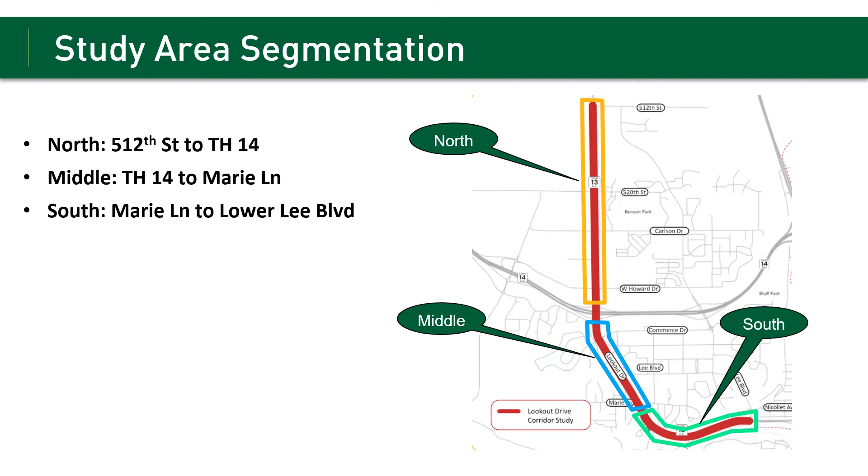Throughout the first engagement period in the fall of 2021, we heard the following general themes in the feedback provided. Lane configuration: the roadway may not be configured to make the best use of available space to meet the various needs of the corridor. Bike access: bicycles do not have dedicated and safe facilities to utilize along the entirety of Lookout Drive. Traffic speeds: posted speed limits are high in certain areas of the corridor, primarily in the middle segment, given the surrounding context. Roundabouts: related to speeds and lane configuration themes, consider implementing additional roundabouts along the corridor. Pedestrian safety: not all crossings are configured in a way that feels safe to cross Lookout Drive. Traffic noise: high speed and truck noise contribute to a higher than desired roadway noise.

We also asked users how satisfied they are with the corridor as built today, both north and south of Highway 14. North of Highway 14, almost 40% of users are somewhat dissatisfied with the corridor, and another 50% are somewhat satisfied. Common themes based on desiring better walking and biking infrastructure to allow children to get to school safely.

South of Highway 14, almost 60% of users are dissatisfied with the corridor, 10% are somewhat dissatisfied, and 20% are somewhat satisfied. Common themes revolved around speeding, noise, and walking/biking safety.

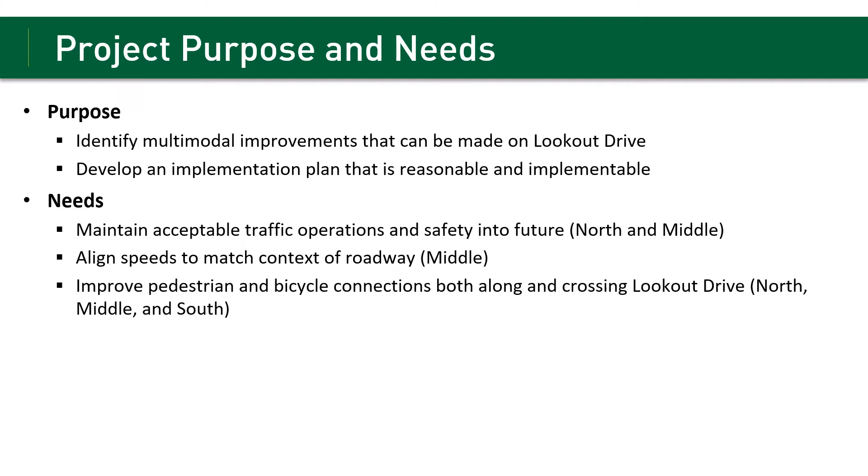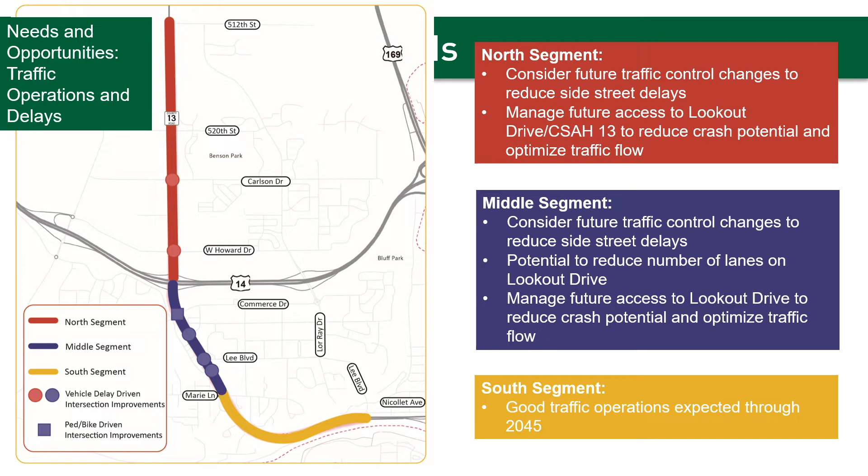Related to pedestrian and bicycle connectivity, each segment has a variety of needs and opportunities. North segment: no sidewalks or trails are north of Carlson Drive, there are no marked pedestrian crossings north of Highway 14, and there is a 45 to 55 mile per hour speed limit, which makes it difficult to cross on foot during high traffic time periods. Middle segment: traffic speeds over 50 miles per hour are common, there is a 5+ lane roadway width, and it is challenging for pedestrians to cross in this environment.

South segment: there are no sidewalks or trails. Pedestrians and bikes frequently use the shoulder. Reconsider need for truck climbing lane.

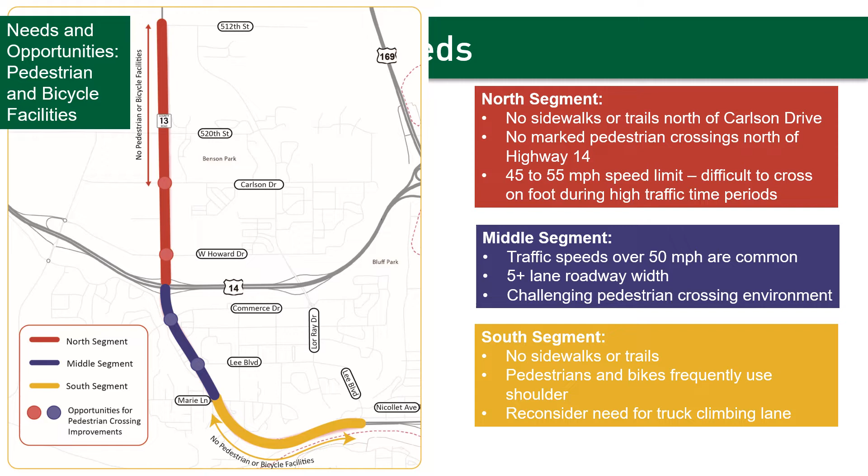As development continues to occur, added traffic will continue to increase pressure at intersections along the northern portion of the corridor. North segment alternatives include intersection modifications at Tim Road, Carlson Drive, and Howard Drive, as well as potential changes to the roadway itself north of Carlson Drive. Roadway changes would include ensuring proper pedestrian and bicycle infrastructure is incorporated.

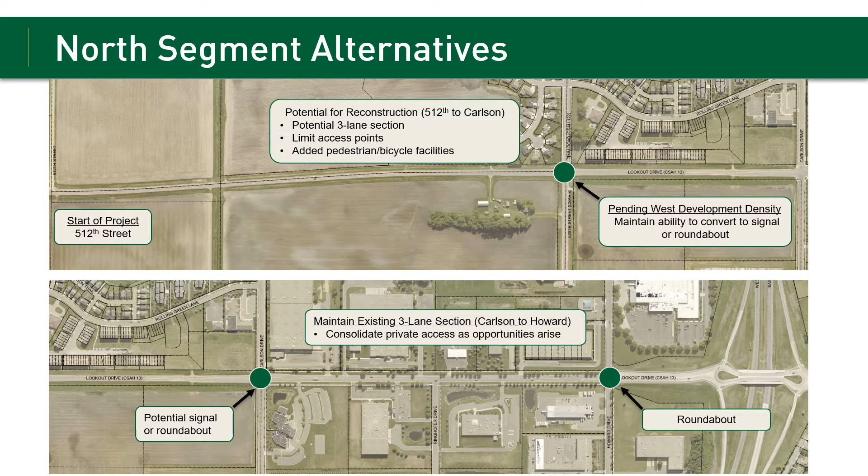The portion of roadway north of Carlson Drive currently is a 2-lane roadway. As development occurs, continuing the three-lane design from the south into this area will help manage conflicts, provide necessary turn lanes at key intersections, and allow for pedestrian and bicycle infrastructure to be installed.

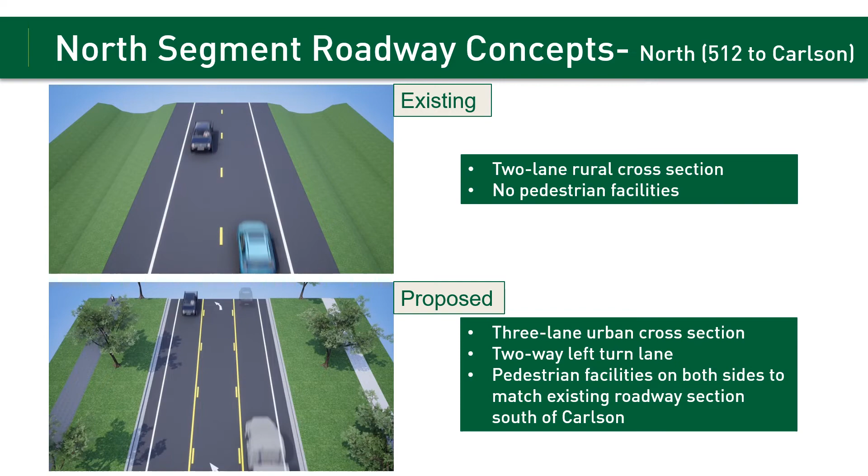Middle segment alternatives include intersection modifications at Commerce Drive, Upper Lee Boulevard, and Marie Lane, as well as potential changes to the roadway design itself, as described in the following slides.

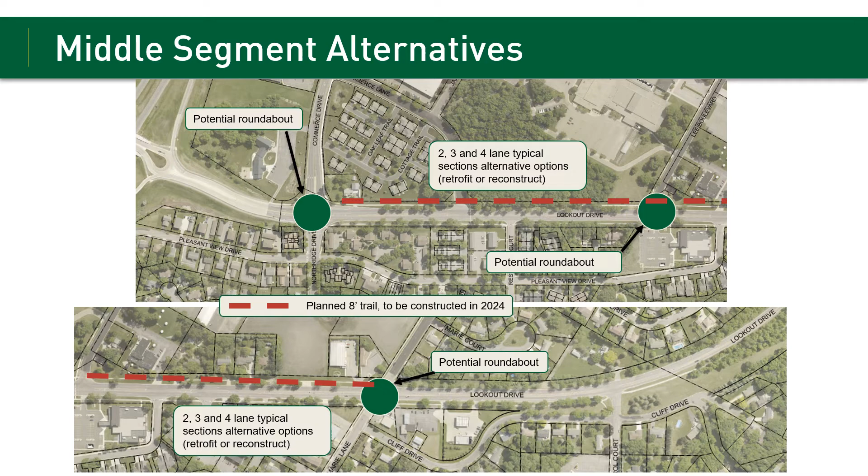The existing roadway section is 5 lanes wide, with 2 lanes in each direction and a center turn lane.

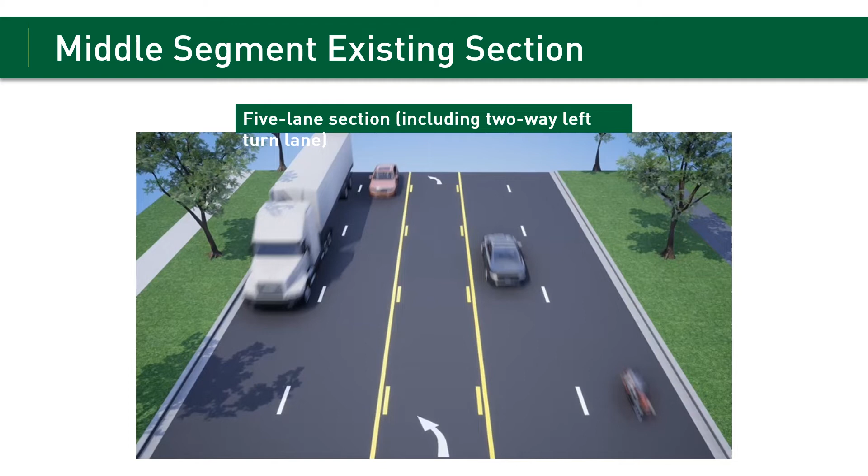The existing roadway section has a capacity of approximately 25,000 vehicles per day, which is about 2 times higher than the existing traffic volumes. Future traffic volumes are projected to be less than 15,000 vehicles per day in 2045. The 5-lane roadway design is not necessary to manage the levels of traffic forecasted for this corridor. Therefore, reduced footprint scenarios were considered as shown on the following slides.

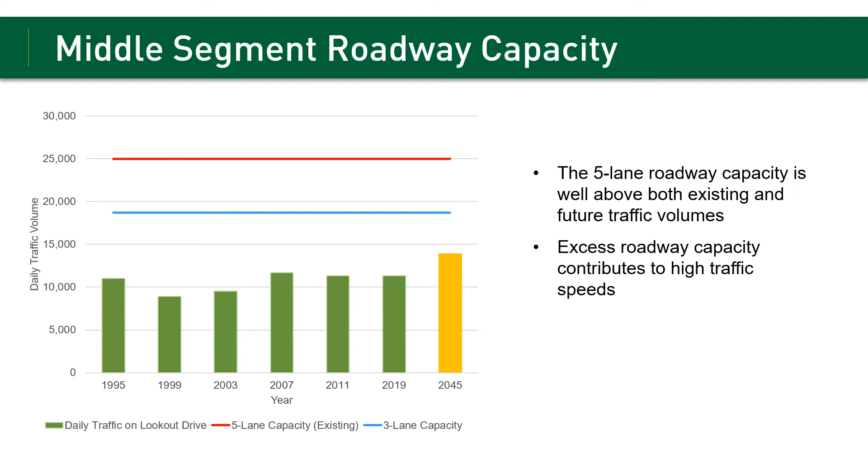Middle segment roadway concepts. Alternative 1 would include a 4-lane divided urban typical section, a raised median in place of the existing 2-way left turn lane, and would maintain existing outside curb limits.

Alternative 2 would include a 2-lane divided urban typical section, a wide raised median, left turn lanes with pedestrian refuge at intersections, and would maintain existing outside curb limits.

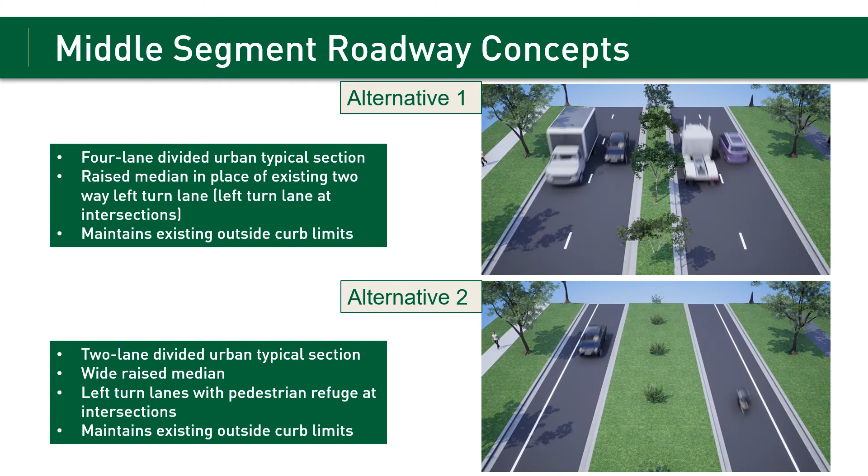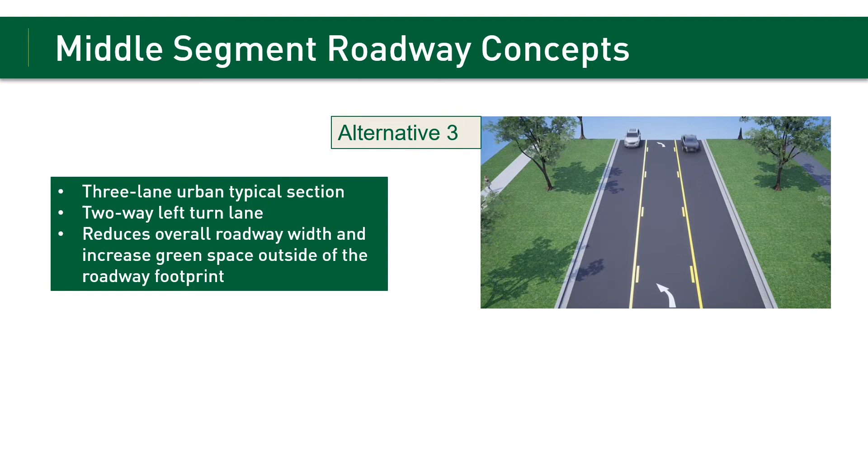Alternative 3 would include a 3-lane urban typical section, a 2-way left turn lane, and would reduce overall roadway width and increase green space outside of the roadway footprint.

The south segment from Marie to Lower Lee Boulevard contains one main intersection at Carroll Court and also the scenic overlook partway down the hill.

This segment of Lookout Drive does not have dedicated pedestrian or bicycle facilities, and users are frequently seen using the roadway shoulder on this high-speed segment.

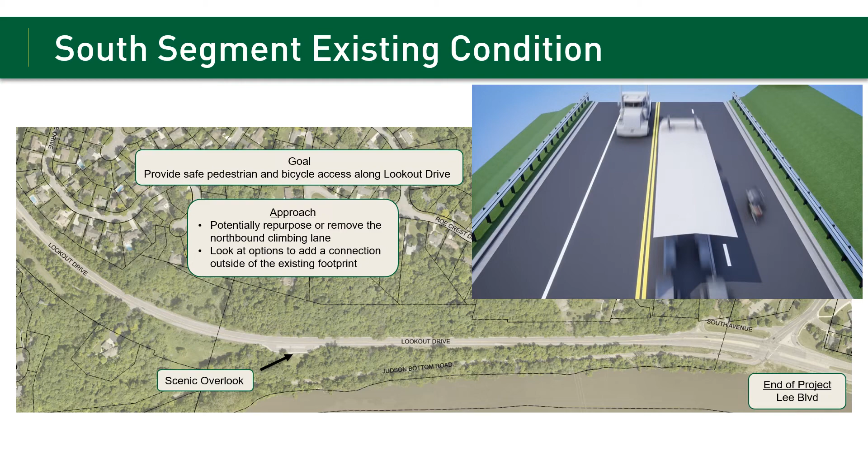This is a missing link in the non-motorized network to allow users to travel between Lower and Upper North Mankato, as well as access amenities such as the scenic overlook. The main goal of alternatives in this area of the corridor is to install dedicated pedestrian and bicycle facilities.

4 alternatives were considered to add connectivity as shown on the slide. 2 involve retrofitting a connection into the existing roadway width, while 2 require widening to add the connection. The goal is to connect from Marie to Lower Lee.

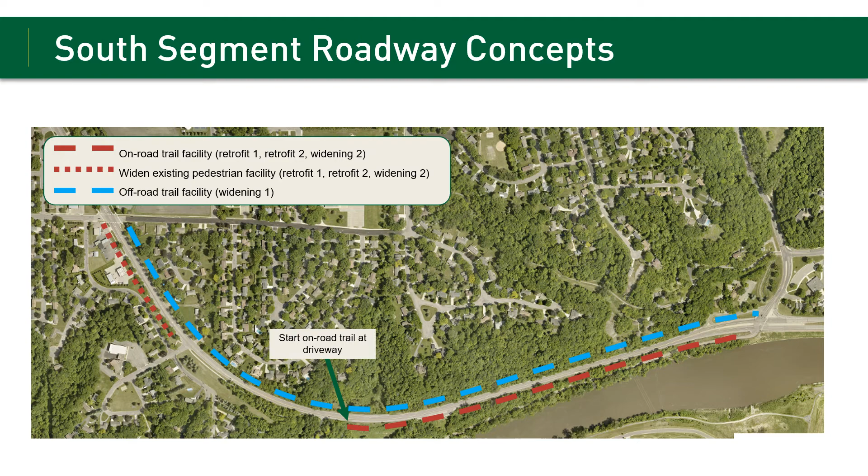The first retrofit alternative can fit a minimum trail width connection into the existing roadway footprint by repurposing shoulder space and narrowing lanes. The second retrofit alternative can install a wider trail with additional buffer between moving vehicles by removing the second northbound lane.

Heavy truck traffic counts taken as a part of this study are not high enough now or in the future to justify a second lane used for climbing. In addition, the majority of truck traffic using Lookout Drive is able to utilize Highway 14 and 169 to navigate to their destinations.

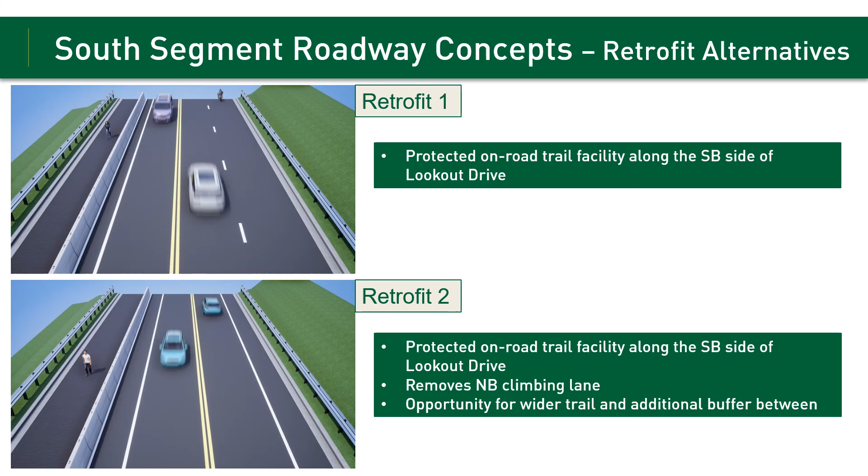Both alternatives require the use of a physical barrier to separate the trail from vehicle traffic as shown.

The second set of alternatives requires roadway widening. In both cases, the roadway itself will remain as it is today, with 1 lane southbound and 2 lanes northbound.

Widening option 1 would construct a trail on the northeast side of Lookout Drive, and widening option 2 would do the same on the southwest side.

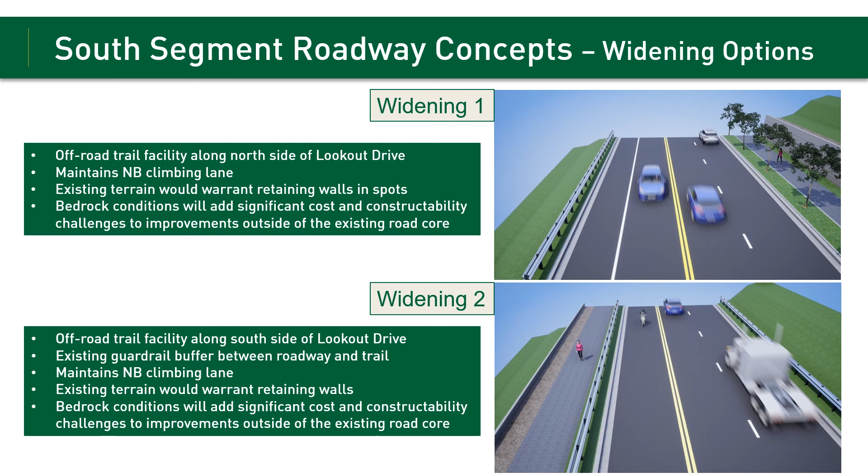In both cases, topographic and geotechnical considerations would add significant cost and potentially render a design infeasible. For this reason, neither of the widening concepts is being pursued any further.